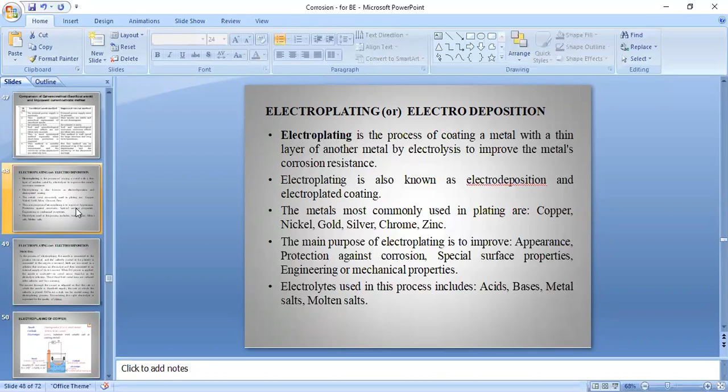Let's understand the process of electroplating by taking the example of coating of copper. The coating metal, that is copper, or some inert metal like platinum or graphite, acts as anode, and the article to be coated acts as cathode, for example, a cooking pan. CuSO4, copper sulfate, is used as electrolyte. It should be a solution with the soluble salt of the coating metal itself. Here we are coating copper, so we will be taking an electrolytic solution of copper sulfate.

When direct current is passed, CuSO4, the electrolyte, first decomposes into Cu2+ and SO4 2- ions. The Cu2+ ions get reduced at the cathode to form copper and are deposited on the article to be coated. As the copper ions are getting deposited, the electrolyte is getting deficient of copper ions, and in order to compensate the loss, the copper at the anode reacts with the SO4 present in the solution to form CuSO4 with the release of 2 electrons, and hence it gets dissolved in the solution. Therefore, the copper is getting oxidized at anode. The electrons released in the process of oxidation pass and reach the cathode.

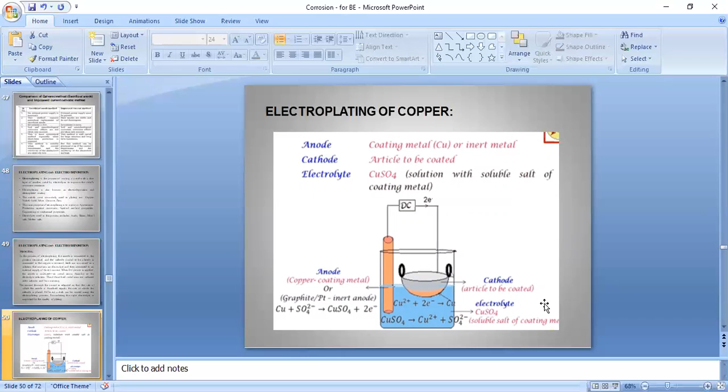Now let's see the reactions taking place. At first, when direct current is passed through the electrolyte, CuSO4, it decomposes into its ions: CuSO4 gets decomposed into Cu2+ and SO4 2- ions. At cathode, Cu2+ ions get reduced to copper and get deposited on the article. That is, the coating of copper is taking place at cathode.

At anode, there may be 2 cases. Case number 1, if the anode used is the coating metal itself. For example, in our case, we have used copper as the anode. So the copper is getting oxidized to form Cu2+ ions, and it reacts with SO4 2- and forms CuSO4 with the release of 2 electrons.

In the second case, the anode used may be an inert metal like platinum, graphite, etc. In this case, electrolyte has to be added to maintain the concentration of CuSO4, whereas in the first case, we need to change the anode periodically. So this is the difference when the anode used is the coating metal itself, or an inert metal like platinum, graphite, etc.

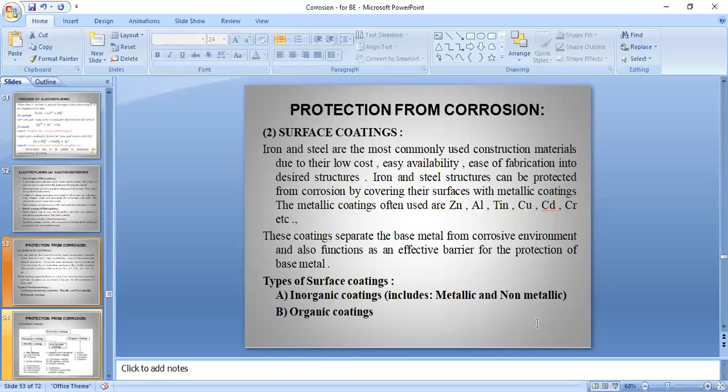In the metallic coatings, the example process is known as the hot dipping process, which is covered in your syllabus, and we'll be learning about the two hot dipping processes, galvanizing and tinning. And there is also another method called metal cladding. Now next is non-metallic coating, surface or chemical conversion coatings. Organic coatings include coating by paints, varnishes, enamels, etc.

So let's start with anodic and cathodic coating. Anodic coating and cathodic coating will be explained by taking the example of galvanizing and tinning. So for anodic coating, the example is galvanizing. Here the coating of the more active metal, that is the metal with less standard reduction potential, over the less active metal, that is the metal having high standard reduction potential, is done. For example, zinc coating over iron.

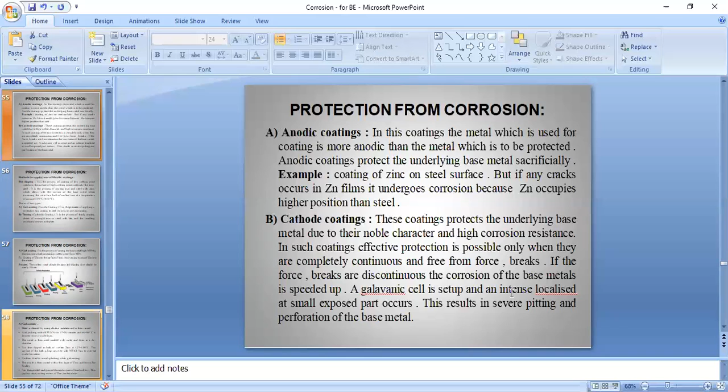Amongst cathodic coating, the example is tinning. The coating of the less active metal, that is the metal with more standard reduction potential, is done over the metal which has less standard reduction potential, that is the more active metal. For example, tin coating over copper, iron, etc. So we'll understand these two types of coating, galvanizing and tinning, in detail now.

So the process which is used for galvanizing and tinning is termed as hot dipping. So what do you understand by hot dipping? That is, whatever material we are using for the dipping process, the temperature would be high. So the metal to be coated would be dipped in the solution. Therefore it is named hot dipping. It is the process of coating the base metal, that is the metal with higher melting point, by dipping into the bath containing the coating metal, and the coating metal will have low melting point.

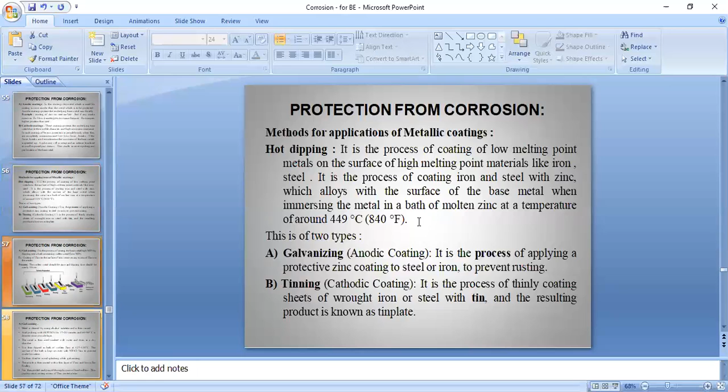We'll study two types here. Galvanizing falls under the category of anodic coating, and the second would be tinning, which falls under the category of cathodic coating. Let's start with galvanizing. What is galvanizing? Galvanizing is a process of coating the base metal, that is the metal with higher melting point, by dipping into a bath containing the molten coating, that is the metal with the low melting point.

The first process is cleaning. So for cleaning, that is cleaning the metal against dust and dirt, it is kept in the alkaline solution, and the process is called the degreasing process. So the first process is degreasing. Then the metal is rinsed using a water bath. Then it is taken to the pickling process. Pickling is dipping the metal in dilute HCl or dilute H2SO4, so that the oxide layer, if it is formed over the metal surface, gets removed.

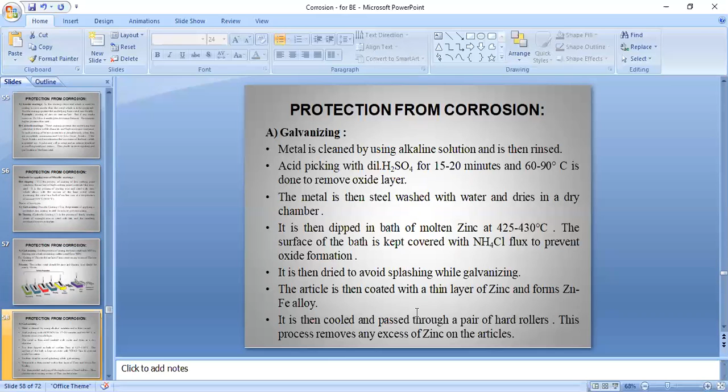Then it is dipped in the hot galvanizing bath, where the zinc coating takes place. In several coating layers, the zinc and iron diffuse and form the zinc-iron alloy of 5 layers. Then finally, after the process of galvanizing is completed, it is quenched using a water bath. By quenching, the topmost layer becomes very hard, and finally it is cooled and the components are now ready for inspection. So let us see once again the entire process.

The process includes degreasing, removal of dust and dirt, rinsing, that is washing in the water bath, pickling, that is removal of oxide layer using dilute acids, then again rinsing before fluxing takes place. Now fluxing is done before the galvanization process, which includes zinc ammonium chloride flux. And finally it is dried before galvanization, and then it is galvanized using a zinc bath, and after galvanization, cooling and inspection are conducted. So this is the entire process of galvanizing.

So let us now understand the surface preparation process. Majorly, the surface preparation process includes degreasing, which we have just seen, that is caustic treatment, which removes dirt, oil, grease, etc. present on the metal surface. Then surface preparation happens by pickling, that is using dilute HCl or H2SO4 in order to remove oxides and scales if they are present over the metal surface. Then fluxing is done using ZnCl2 and NH4Cl, a protective layer to prevent the oxidation of the base metal. That is, the base metal will not get oxidized if fluxing is done.

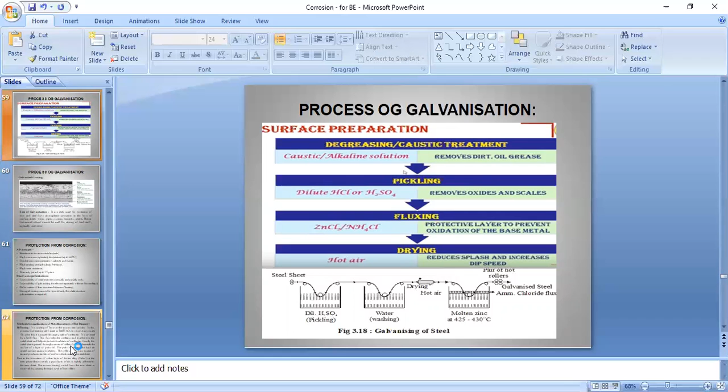The base steel forms the base layer or the bottom layer. Then gamma, delta, zeta and eta layers are formed. Depending on the names, they have different concentrations. Suppose we take the example of eta. It has 100% zinc. Zeta has 94% zinc and 6% iron. Delta has 90% zinc and 10% iron. Gamma has 75% zinc and 25% iron. And finally, the bottommost layer, the base steel, contains 100% iron. So as we go from bottom to top, the composition of iron and zinc changes.

So now the process of galvanizing is over. Now let's see a few uses of galvanization. Galvanization is widely used for protection of iron and steel from corrosion, and it is used in the form of steel wires, GI pipes, that is galvanized iron pipes, nails, screws, nuts and bolts.

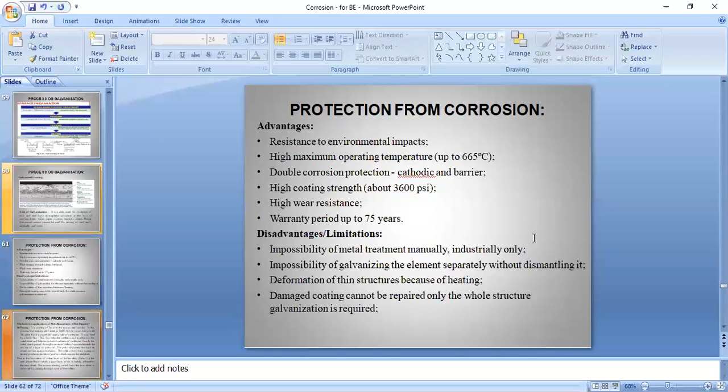So now let's see the next application of metallic coating, that is hot dipping, and the process is named tinning. It is again a type of hot dipping process. Tinning is a process of coating the base metal, that is a metal with a higher melting point, by dipping it into a bath containing molten tin. Because the process is tinning, tin is being used. So tin is coated over some other metal and the process is named tinning.

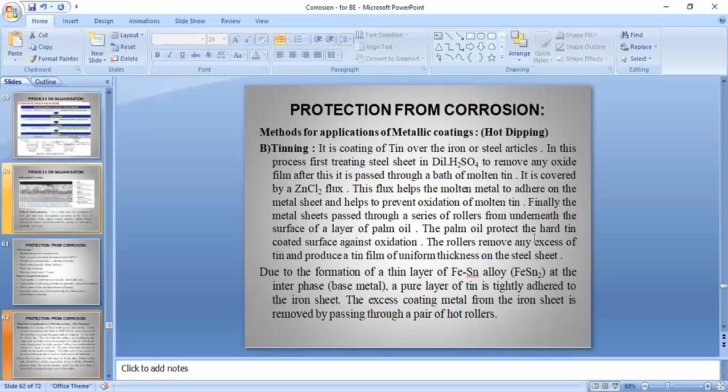Let's see the process. Here it is, the tinning process. Suppose a mild steel sheet. This is the mild steel sheet which needs to be tinned. The mild steel sheet which is pre-treated is once again pickled by using dilute acid, that is HCl or H2SO4, similar to galvanizing, because it may have developed some kind of oxide layer even though pre-treatment has been done. Pre-treatment before pickling is also done.

But to make sure that the metal does not contain any oxide layer before the tinning process, once again the pickling process, that is treatment of the mild steel, the metal to be tinned, is done using dilute acid, maybe HCl or H2SO4. It is then passed through the tinning bath through ZnCl2 flux. Then the coating is done over the steel.

Suppose the steel needs to be coated with tin. It then passes through the next container having again the zinc flux, but here the temperature is a little lower compared to the first zinc flux container, and the difference is it has an oil or grease layer over it. It passes through this zinc flux and the coating is done. It also acts as a wash pot for the metal which is now coated with tin. It passes through the squeeze rollers now.

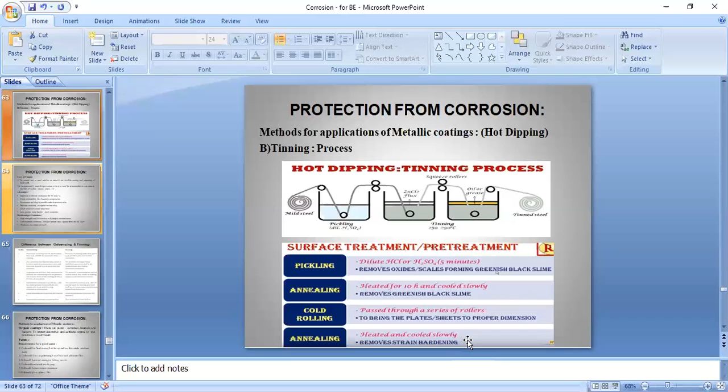It removes the greenish black slime which is a coating over the metal surface. Then cold rolling is done with the help of rollers. Then again annealing, that is heating and cooling down slowly in order to remove any strain hardening if it is there. So this is the process of tinning.

So now let's see a few uses of tinning. Tin coated iron or steel articles or utensils are used for storing and preparation of foodstuff. As we have seen in galvanization, galvanized materials cannot be used to store foodstuff, but tinned steel articles or utensils can be used to keep foodstuff, because it does not cause corrosion or the production of any harmful

substances. A few other uses include automotive, food services, electrical and electronics, telecommunication, medicine, energy, and making jewelry. There are a few advantages and limitations of tinning. Advantages include that it improves corrosion resistance of especially iron and copper. It is used for soldering metals.

Resistance welding can be done using this. It prevents oxidation of copper and its alloys. It has good wear and contact properties. It is less porous, more ductile, and more economical. Limitations of the tinning process include that high strength steel is sensitive to hydrogen embrittlement, that is cracking. Under certain conditions, whisker growth may appear from the tin layer, and thickness is not very well

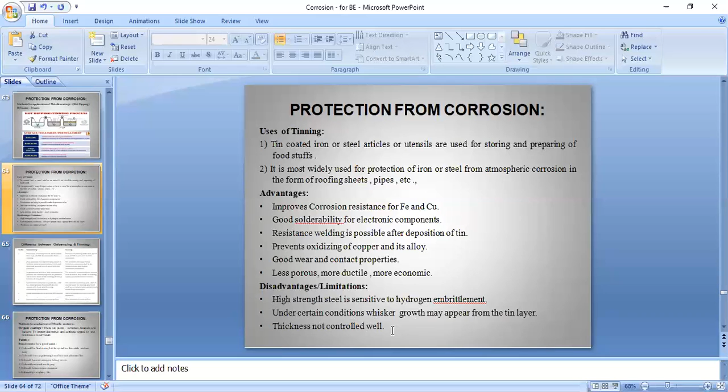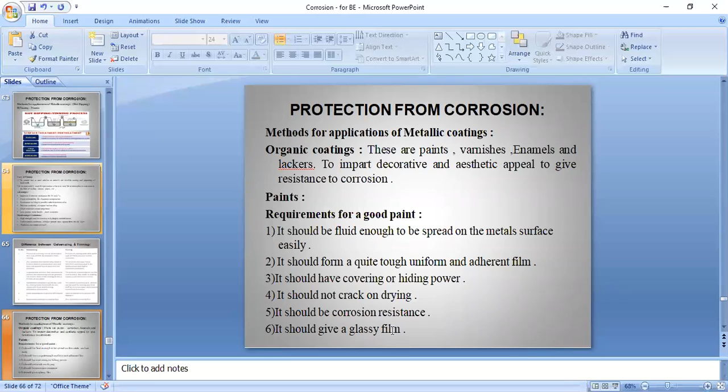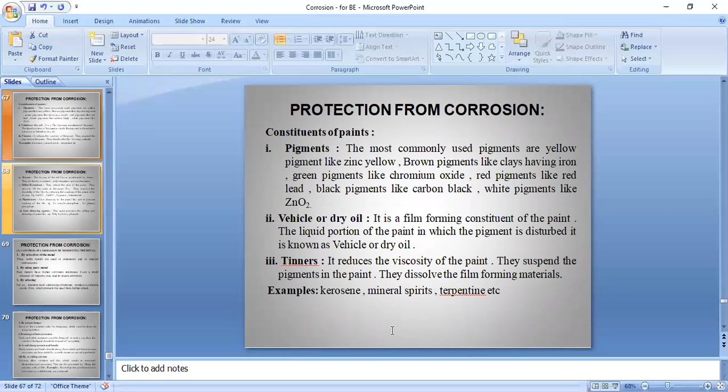Now, metals can also be protected by applying organic coatings. For example, they can be painted. Paints have their own advantages, and there are a few constituents which make up paint, that is the composition of paint: pigments, drying oil, thinners, driers, extenders, plasticizers, and anti-skinning agents. These are what paint is made of, and paint can be used as a coating

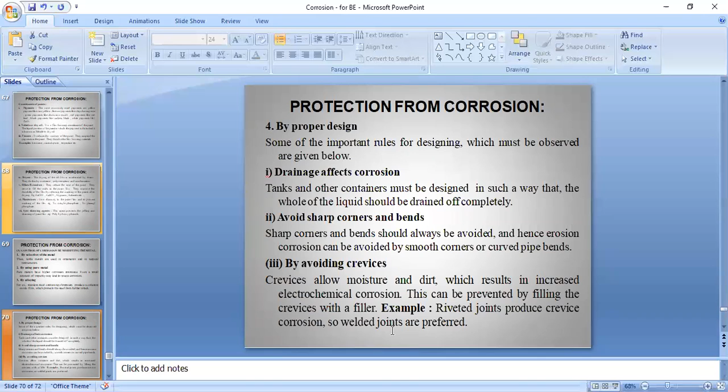The important rules for designing: drainage affects corrosion. So tanks and other containers must be designed in such a way that the whole of the liquid is drained off completely. We should avoid sharp corners and bends while designing. We should avoid crevices, because they allow moisture and dirt to settle.

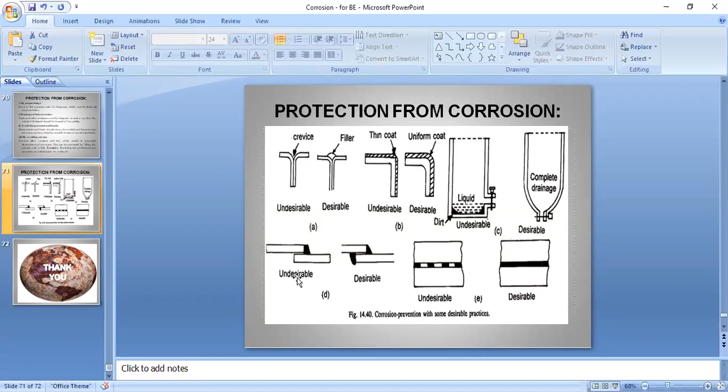So dear students, this is where we'll end the lecture. We have seen the process of corrosion, the different types, and the methods to protect against corrosion.